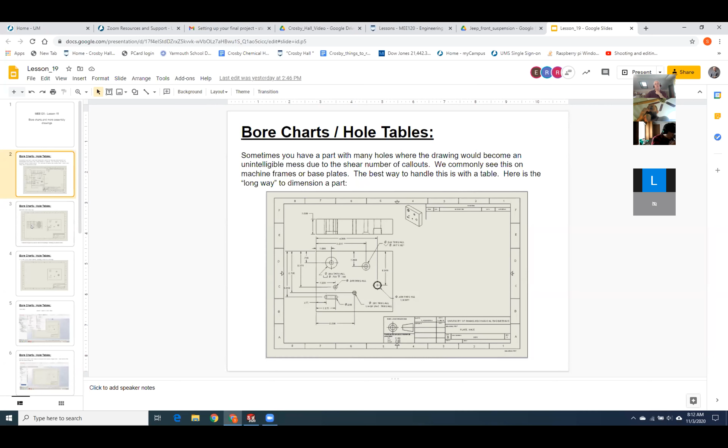That's with something called a bore chart. So rather than dimensioning all this out, what you're going to do is you establish an origin, you create a bore chart, and it gives you the location in X and Y, and then the type of hole. And it looks just like this.

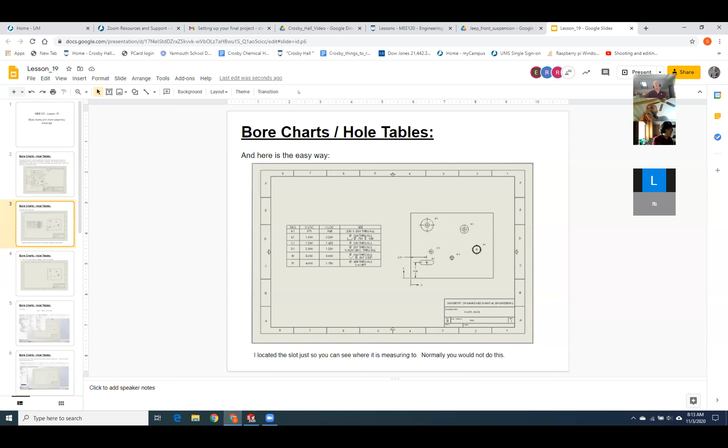So let's go through and demonstrate one of those. If you want to click along, download baseplate from lesson 19. And you can try this with me if you choose.

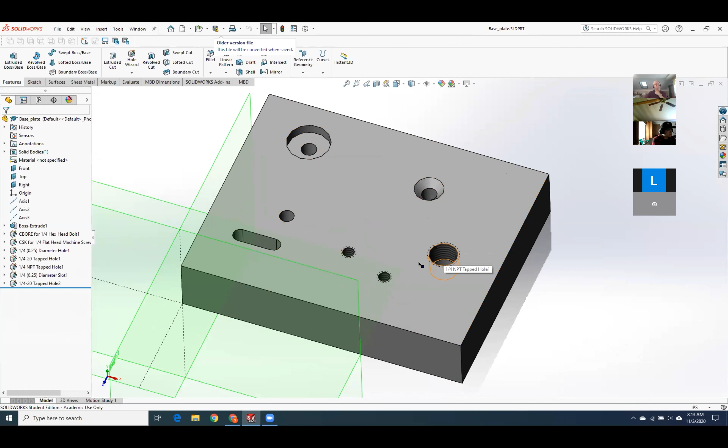Here's my imaginary base plate with a whole bunch of holes in it, all kinds of different types. We got a counter bore hole, countersunk hole, a pipe tap hole, a couple of quarter 20s, we got a slot. Now let's make a drawing of this thing.

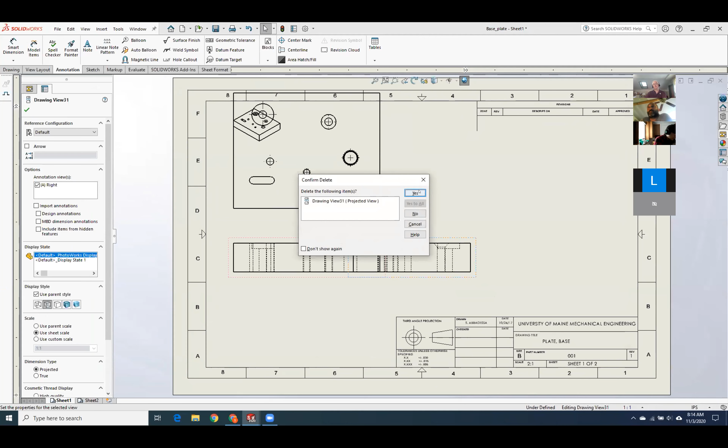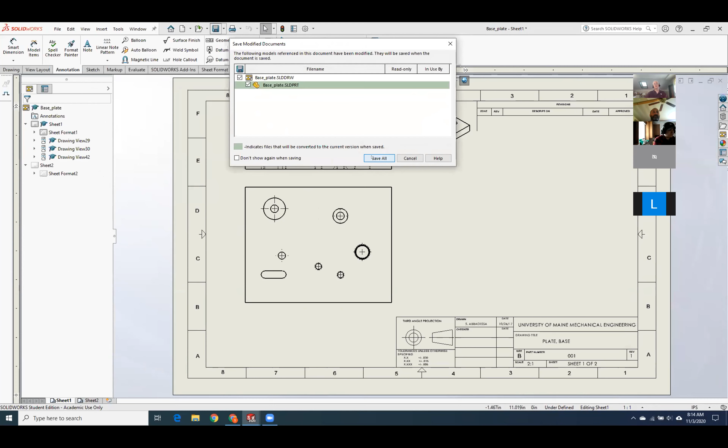So if I want to have all of this stuff annotated for me in a nice, easy fashion, I'll click on Insert, Tables, and we'll come down to Hole Table. Hole Table, Bore Chart, it's the same thing.

So first off, we're going to establish our XY origin. I'll establish my X-axis right here. We'll choose edge 1, we'll do the Y-axis. And you can see the start of an origin.

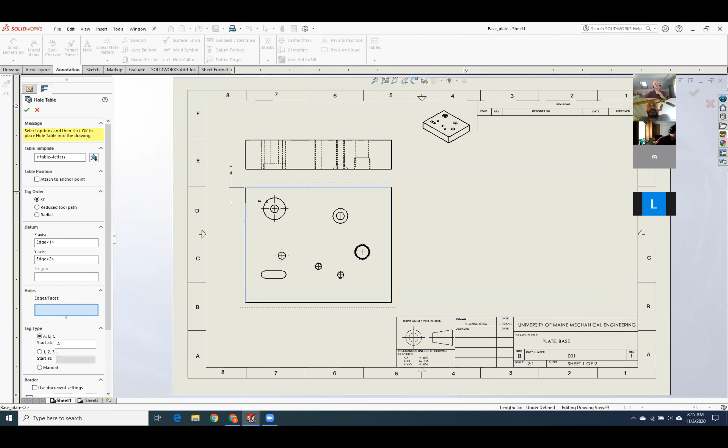And then we have to choose the face that we want to get the data on. We'll choose this face right here. As soon as I click the green check, it gives me this very nice little table, and that is all of the holes that I need to put in, as measured from right here.

And this is pretty slick. This is the same thing that you're going to get with the hole callouts. So for example, you get the tap drill size for your quarter NPT, get your tap drill size for your quarter 20s.

So I know some of you guys are still enamored with the idea of cut extruding circles. And I still say it's a terrible idea, but let's try it and let's see what happens.

It doesn't show up right. It shows up wrong. Even when you put the thread feature on, it shows up wrong.

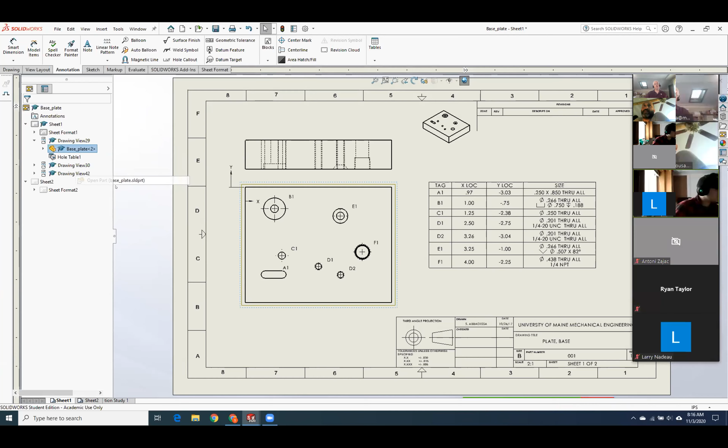Okay, so let's go back into our base plate. A1 is a slot. How does it show the slot? It says that it's a slot. And again, this is why I generally don't like putting in slots as hole wizard items.

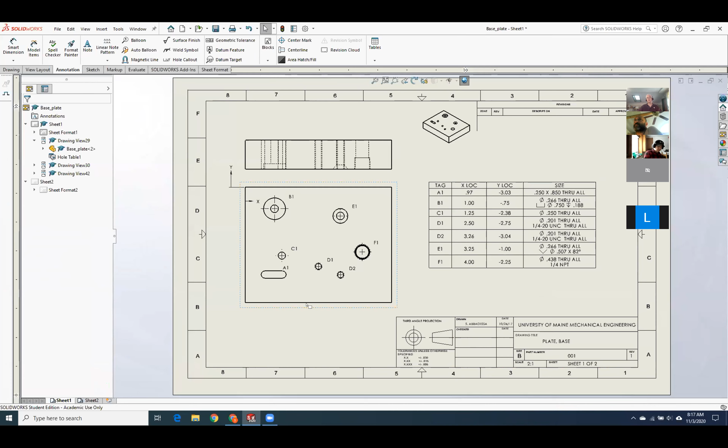Because if I was going to do this slot, the way I would do it is I would come over from this edge. I'll choose the slot option.

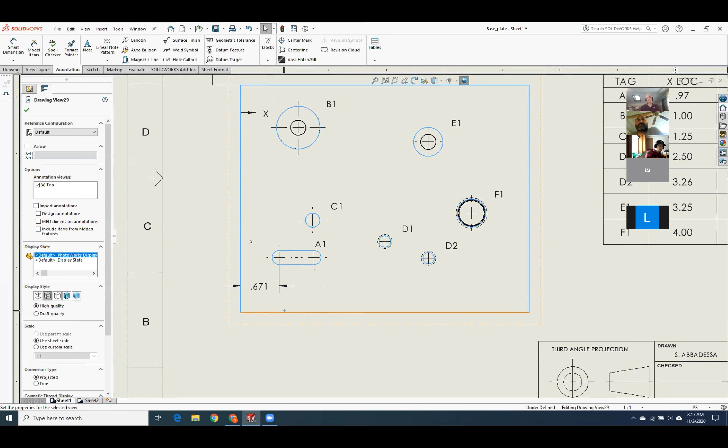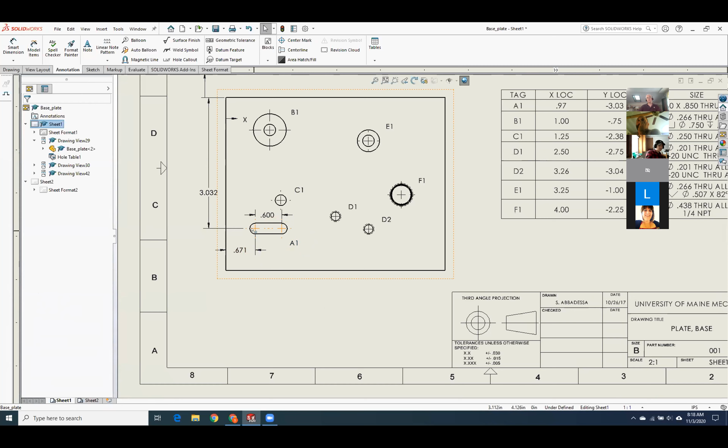So I choose the origin of the slot, and then I would go the length of the slot. And that makes far more sense to me, because this will tell me where to start my cutter at, and this tells me how far over to go. I can just set the digital readout to give me that.

Does that give you the slot radius on the chart? Let's see, so A1, 0.25? Yeah, so it's going to the outside ends of the slot.

Professor, could you go over one more time how you got that chart of bore callouts? Sure. Thank you.

Okay, so the slot does match the callout up here, but they never really gave you the origin of where to start the cut at. So you got to watch the slots on that one. The holes are generally not too bad.

Okay, so let's get rid of this, and I'll show you guys one more time how to do this.

Okay, so once you've got all your views on your drawing, we're going to do what SolidWorks calls a hole table. So we'll do insert, tables, and hole table.

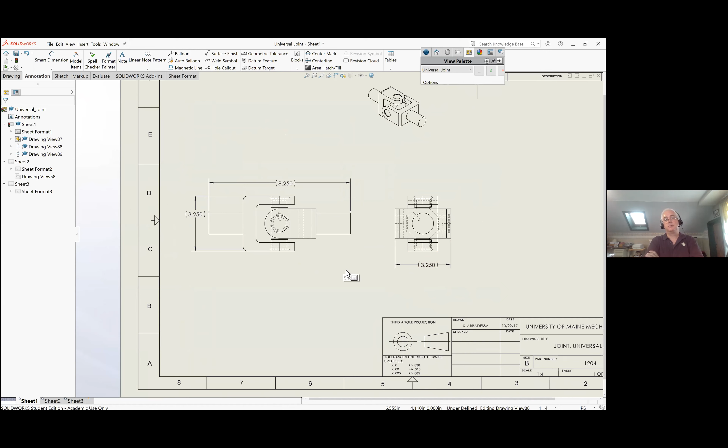Now, the one thing I would say is rather than that right view, how are you going to tell me how deep to press those bearing caps? I told you they were 1/16 of an inch down. Yeah, I guess I could do a section view.

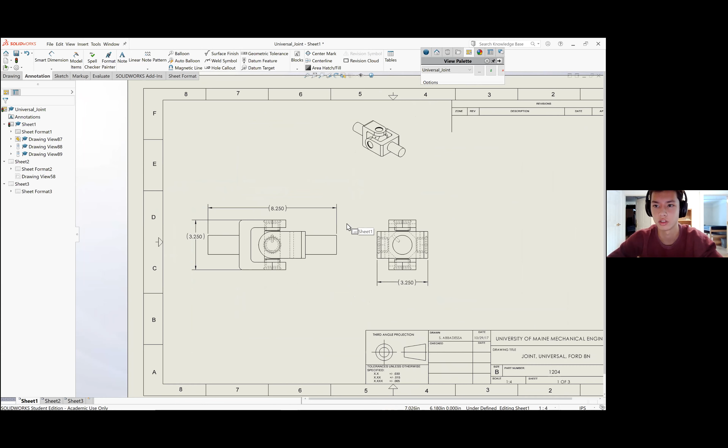Exactly. Okay, so I'm just overall a little bit confused about the 3 pages. I'm not sure about the first page, like what is supposed to be on there. I know overall dimensions.

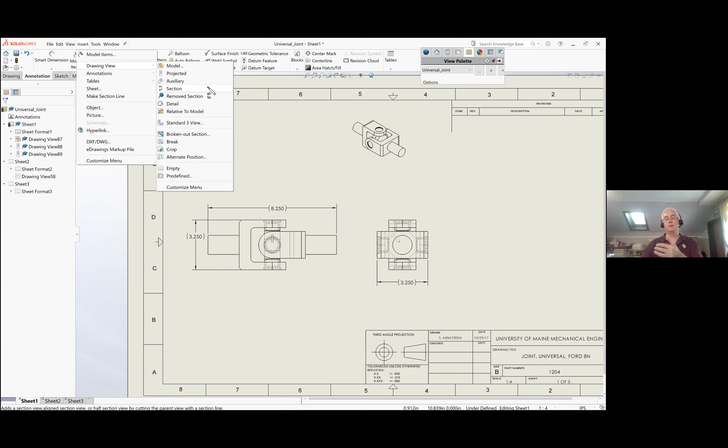Try the other orientation. There you go. Hey, no, you don't want to go there. Like here, right? Yeah, exactly. Much better.

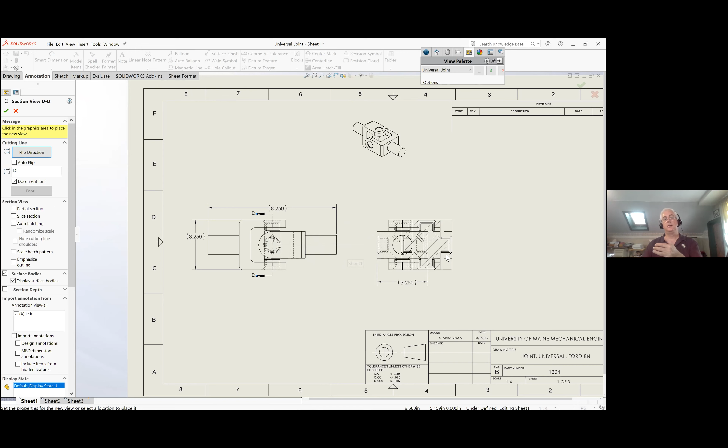I'll deal with that later, but perfect. Okay, so now you've got a nice visible edge, and you can go from the top of the yoke down to the bearing cap.

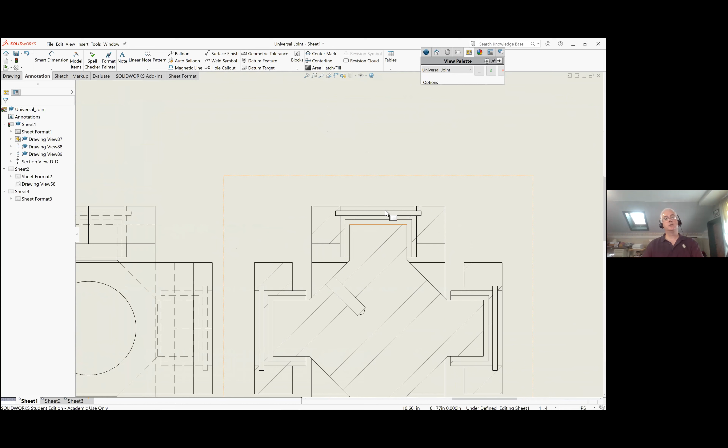Okay, so you mean like up here? Yep. So zoom in, grab a smart dimension, and go from the top. Go down one more. Whoops, maybe go down to the bearing cap.

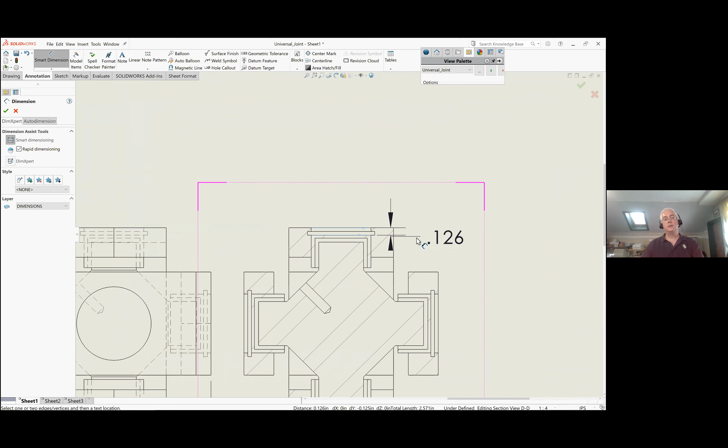Right there? Yep, right there. Maybe I got that wrong, maybe it was 1/8 inch. Close enough. Yeah, it's coming out 0.126, but that's exactly what I wanted.

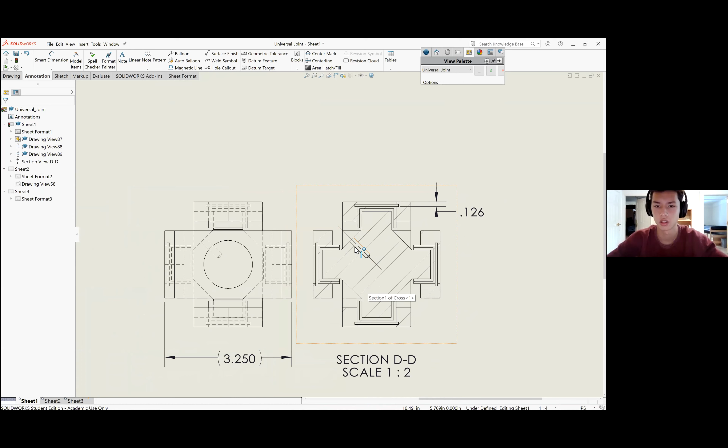That's how you would say push the bearing cap down a specific distance. Okay, and the location of this hole, that should all be included in the part, right? Exactly, that'll go in the piece part print. So I don't need to do a call out or anything for this. Correct, absolutely.

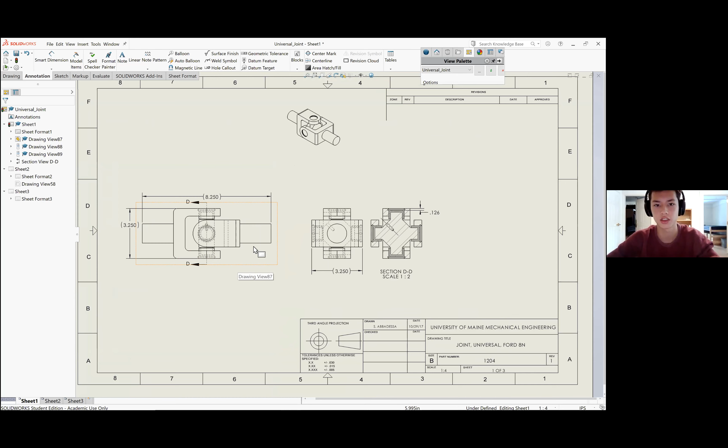All right, so you said dimension anything that you need to locate, but that doesn't include things that are just flush with each other, right? Correct, yes, anything you're going to set. For example, with the nut and bolt example, I set how far the nut was up the shaft of the bolt. In this one, I'm setting the depth of the bearing caps.

Okay, and my last question before I head out was I saw that email about checking in with the Stirling engine. Yep, and I'm signed up for sometime on Thursday. Just how is that meeting? Is there a Zoom link or something?

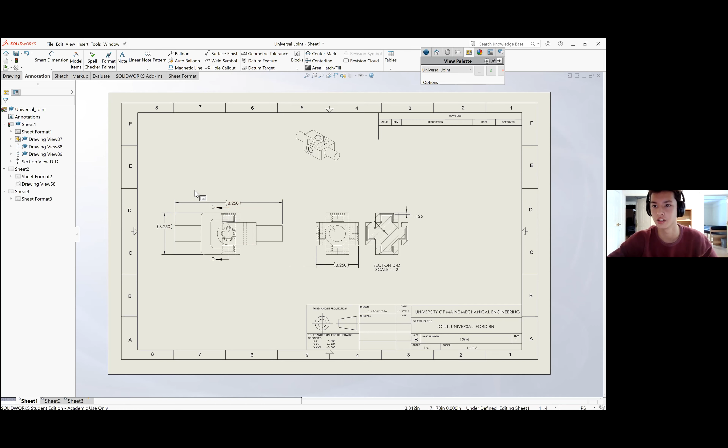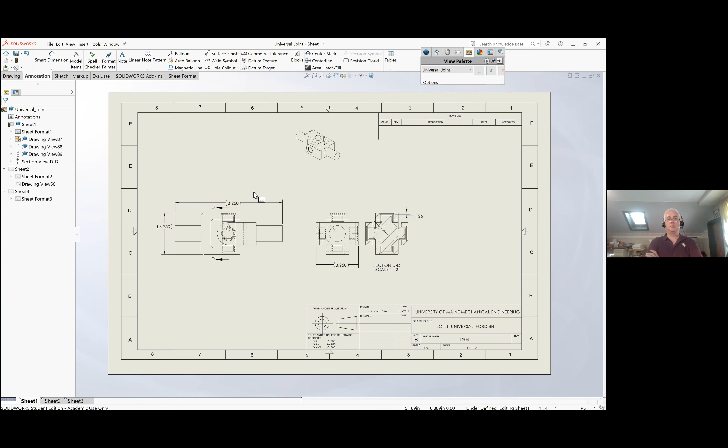Yeah, we'll use the office hours Zoom link, and it's really informal. All I do is I say show me your top level, and then I pick a few components. Typically I say show me your crankshaft, and I check that you have the right offsets for the displacer and the power piston. I make sure you got the 90-degree offset between the two bends. And then I just start looking around a little bit. As long as you're on track and you've got a good model, you're good to go.

Okay, I've done some piece part drawings, and I've spent most of my time on just the actual modeling rather than the drawings yet. Right, okay, so as long as you don't get really behind with it, that's fine. Okay, thanks.

I had a question. Yeah Ryan, go for it. Can I share my screen? It's all yours. Okay.

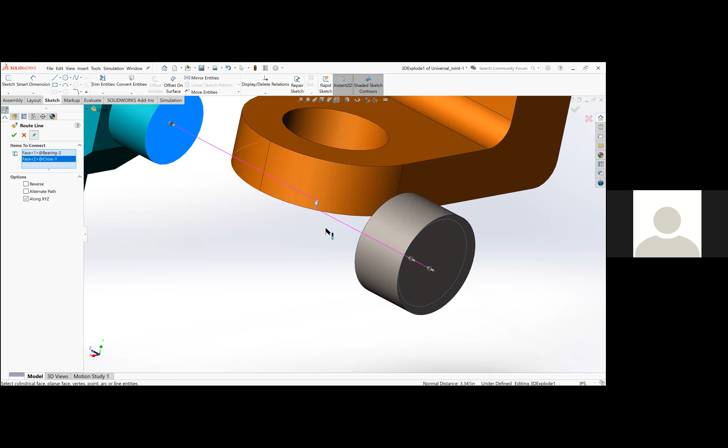Whenever I try to make the route lines, it kind of bends it some weird way. Yeah, in your case doing the route line thing, I wouldn't do that for this exact reason. So I would X out of route line and just manually draw them as sketch lines.

Okay, I'll try that again. Exploded line sketch, so do you not want to do that? Yeah, I would not do route line.

So how do I do it instead? Because I thought you did insert explode line sketch. Okay, so go back over to the assembly manager and go up to the configuration manager.

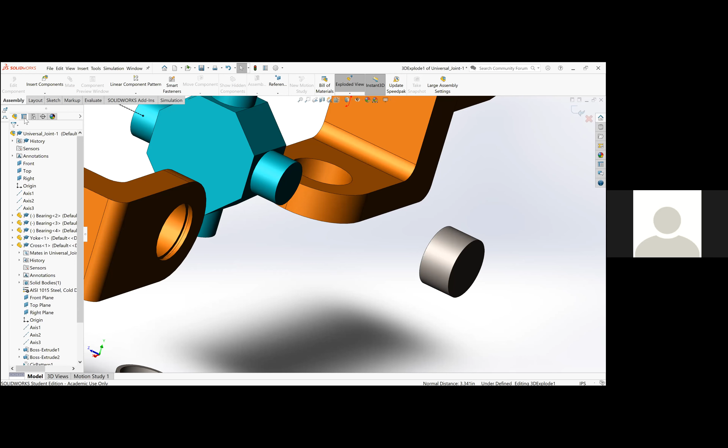It's that middle one, go down to the left. It looks like a couple of pages in an assembly tree. Down to the right, one more icon. There you go, click. Okay, so now expand that default.

Yeah, I tried to do some already. Okay, so you got a bunch of exploded views, you're in exploded view 3. Now expand exploded view 3. Okay, so you do have a sketch. Let's click on 3D explode 1, then right click and hit edit.

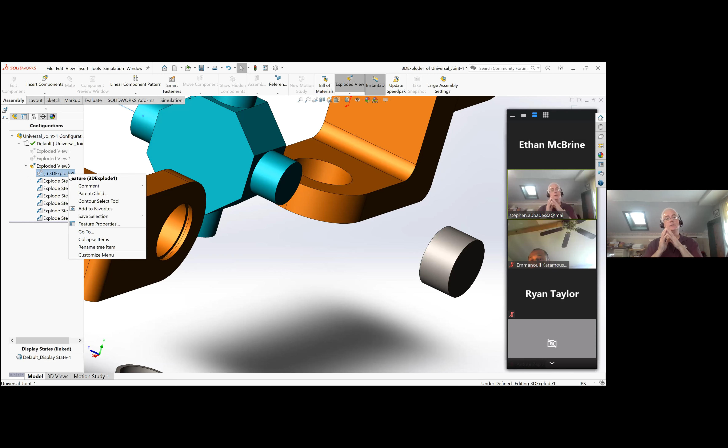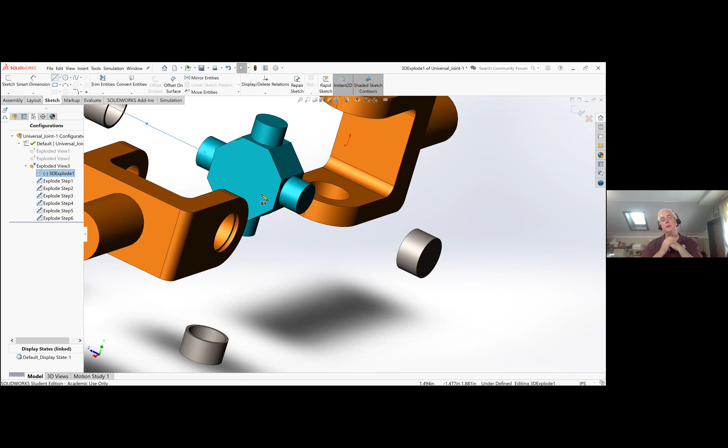Okay, so now go up and click on the sketch tab, and choose your line tool. You should be able to go from center of faces to center of faces. There you go, perfect, click.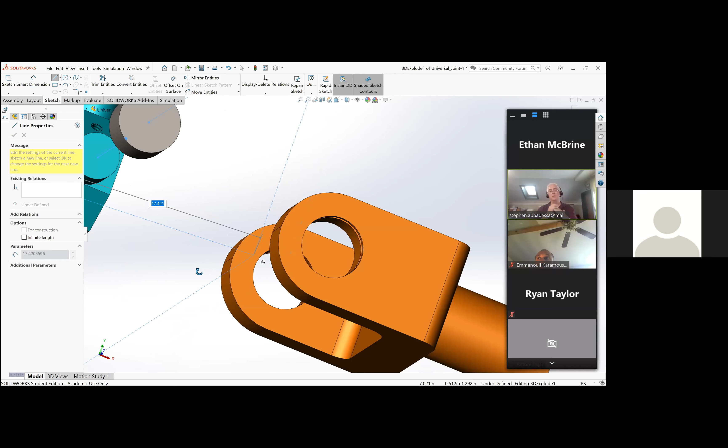Now rotate your view so that you can see into that gray bearing cup. Rotate some more - for some reason my Solidworks is going really slow right now. There you go, okay. Now grab the center of that bearing cup, see if it lets me.

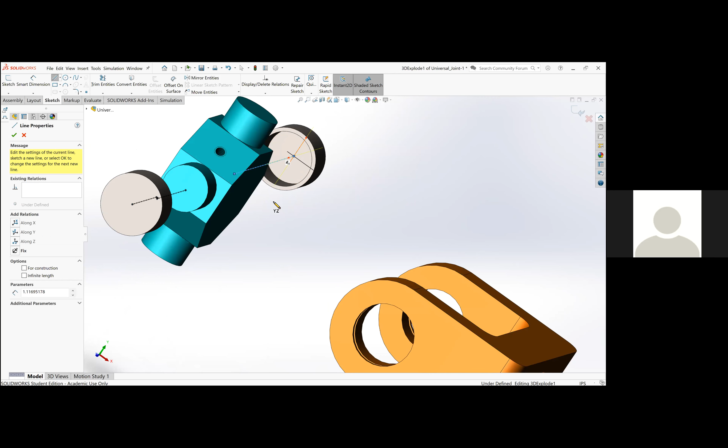So you probably want to highlight one of those edges first and then you'll get the center. Okay, nice, that'll work fine. And now you're not getting all those jaggies and broken edges. Yeah, that makes sense.

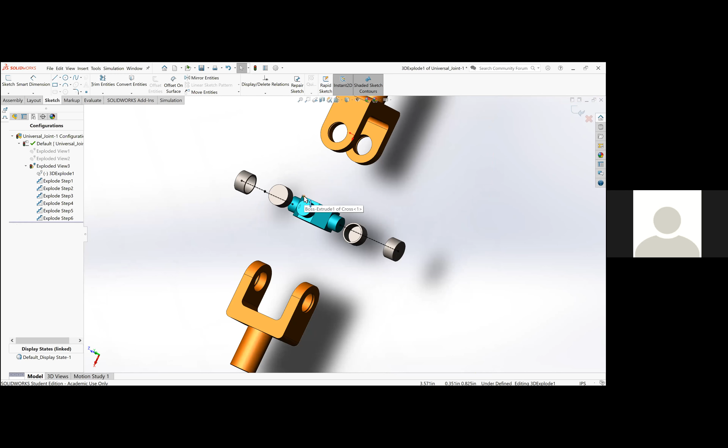And you said for this homework we do this whole thing out - the exploded view, make the 3-page drawing for it? Yep. And then we do the individual piece part drawings for the cross and the yoke, then do the same thing for the Jeep, do a whole assembly, and then the spindle and the brake drum for individual drawings. Correct. Okay, all right, that's all I needed. Thank you, okay.

I have a quick question. So I did the exploded view and all of the sketch lines in the assembly, and then went through the drawing, did my first page, and then I cannot figure out how to do the exploded view in the drawing for the second page. Show me your screen, please.

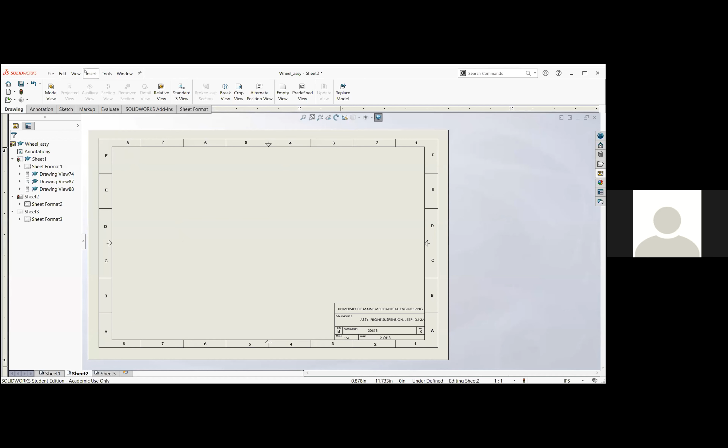Okay, yeah, that makes sense. All right, want me to go back to the assembly or just here? No, I think you're good there. So what you're trying to do is drop in the exploded view. Okay, so click on Insert, go down to Drawing View, then Model.

Wheel Assembly - like drag it over. No, double click on it actually. Oh, there we go, that's what I was missing. Okay, good. So show an explode or model break state.

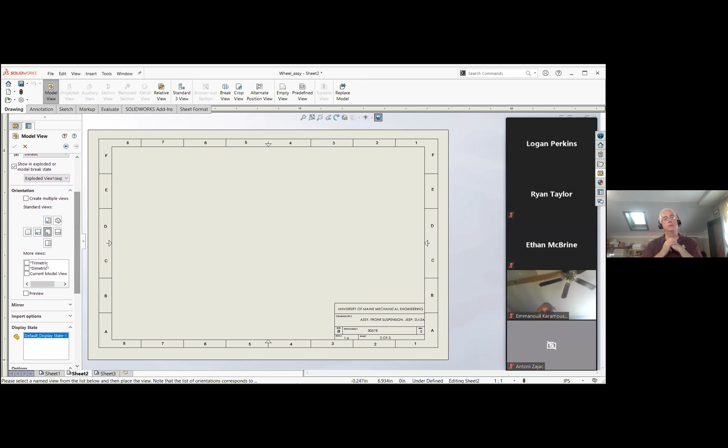That's good. Okay, so what I'm not seeing that I want to see is there should be a named view for your explosion. Yep, I forgot to do that. Okay, so then let's go back to your assembly and create that named view.

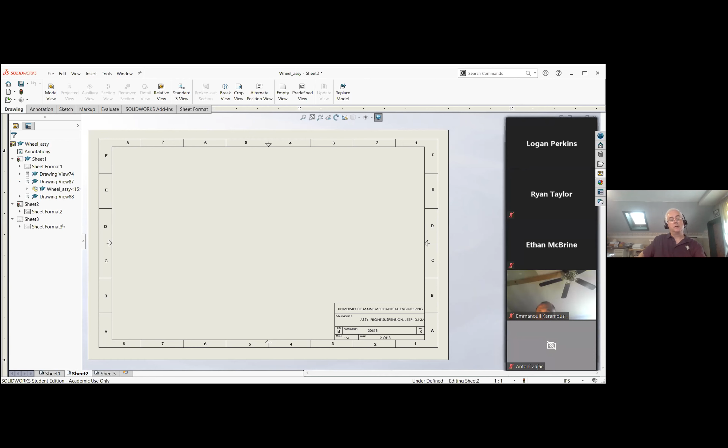So go down, see where it says drawing view 87, expand that. Good. And then on the wheel assembly, right click and hit open. It's not - oh, because we're on the wrong page. Click on sheet 1 and then you'll be able to do it. Gotcha.

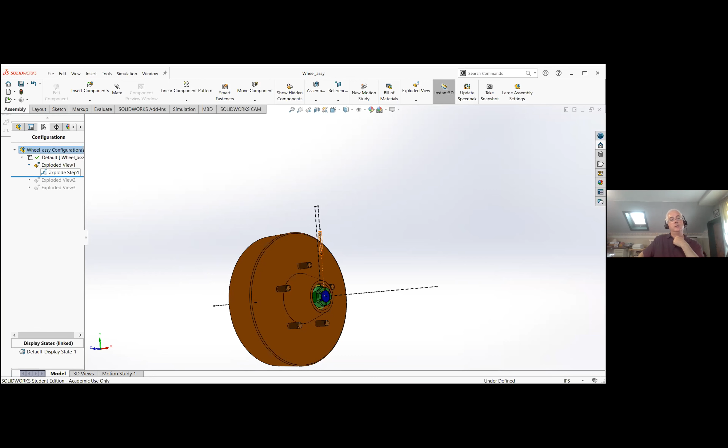Okay, so now let's re-explode this thing. Yeah, that's bad. Yeah, you got something going on there. Expand that. Expand exploded view 1. So that's weird, it was like acting weird.

Maybe it could - can you show this one? Yeah, go ahead and hit delete those other ones. Maybe. Yeah, definitely delete anything you're not going to use. I'll just delete this one. That's not right.

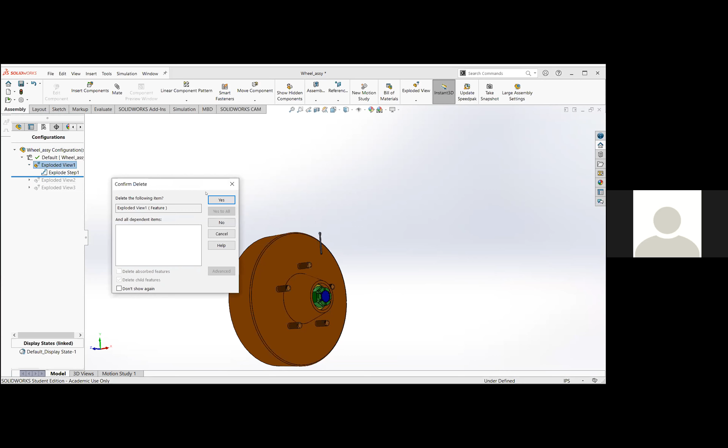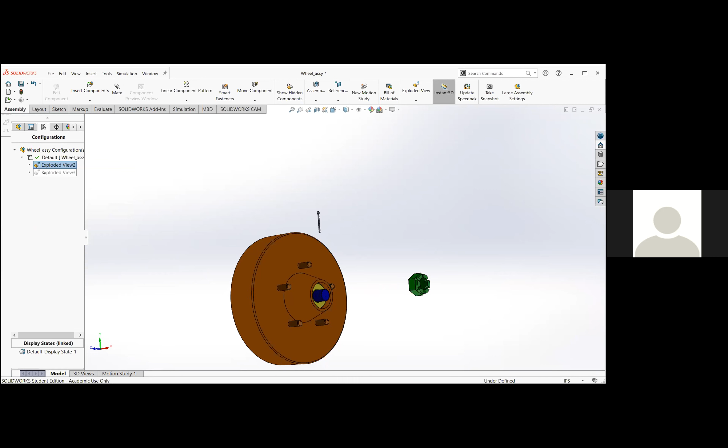Okay, well that's not the right thing. How do I show it? So you're in an exploded state right now. Yeah, but it's not - all right, I think this one. I think it was that last one because I got it right on the last try. There's 3 tries.

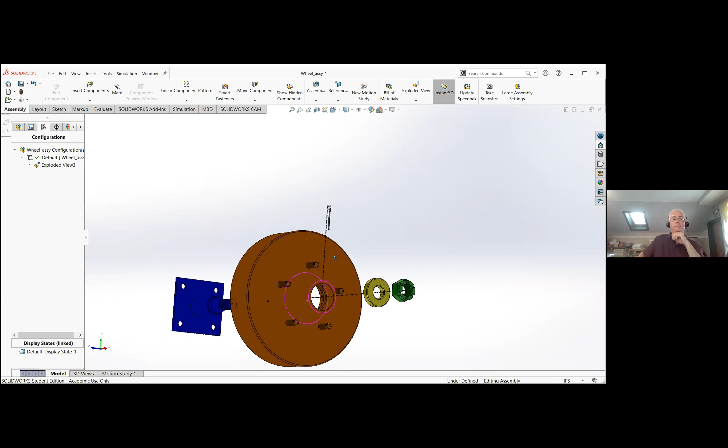Okay, there we go. Nice, okay, so spin the view around however you want it. Something like that, maybe. And just as an FYI, I would have that cotter pin going down into the hole on the blue spindle, because you've got it going down, but you're not showing me where the cotter pin gets installed. Right, so how would I do that?

So you could add another explode step and drag that cotter pin back in line with the hole. And the other thing, what you're telling me with those trace lines, you're saying flip the cotter pin upside down and then ram it through the installation hole, which, you know, that might be hard - that might be a challenge. Yeah.

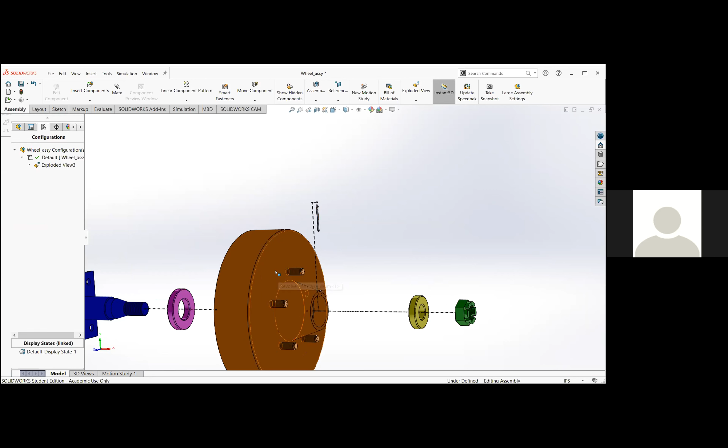Okay, so anyway, I need to add more steps to that. Yeah, so just cotter pin - come off the bottom of the cotter pin, go into the hole. Okay, but that aside, right, go ahead and orient your view however you'd like it.

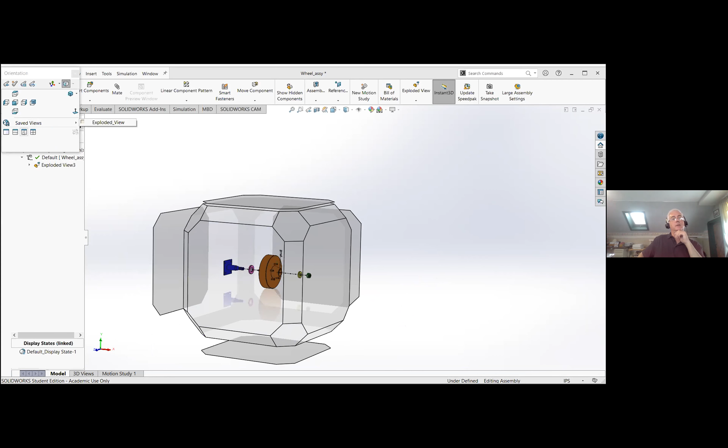Yeah, okay. That looks pretty good. Okay, so right click in the graphics area, go down to view orientation, and then in that dialog, go to the second icon from the left on the top row. Up, there you go, new view. Good, give it a name like 'my exploded view.'

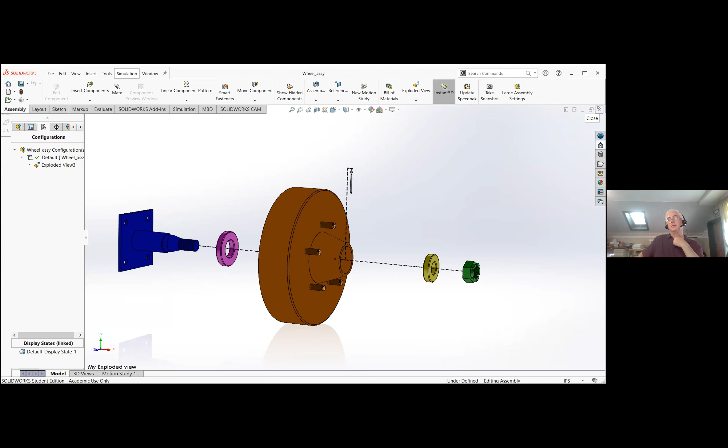Say okay, then you can dismiss that dialog and save it. Okay, now close out this view, do the little X, and there you go - that'll take us back to the drawing. Now let's go to sheet 2 and drop in that exploded view.

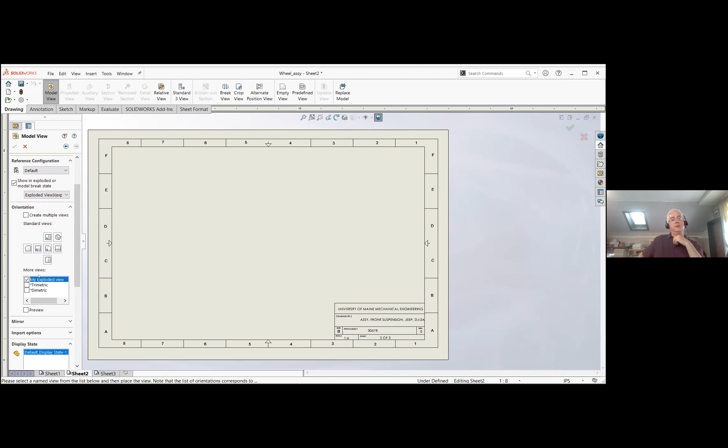Okay, much better, there you go. That's it, all right. Okay, thank you, so other than fixing those little things, you're cooking with gas now. Sounds good, thank you.

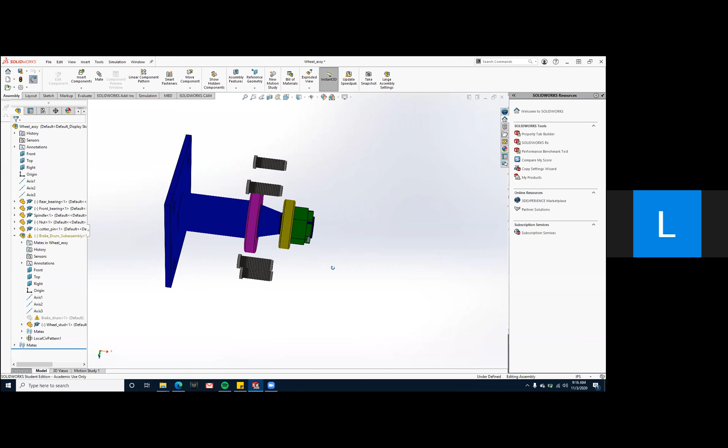Professor Abadessa, when I open the wheel assembly it glitches out, and the brake drum doesn't show. Okay, show me. I'll share real quick. So this is what it looks like whenever I open the wheel assembly, I don't know if you can see that or not. Yeah, so for some reason it didn't load the brake drum subassembly. Try downloading again and reopen it. Okay, I'll do that real quick.

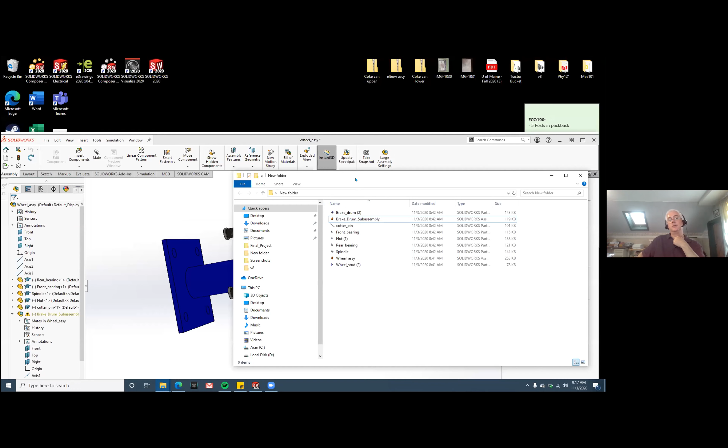Oh, there's the problem right there. Get rid of that one on the end of it. Which one? Oh, this? Yeah, rename it. Okay. Nice, okay, and then get rid of the 2 on the brake drum, it's going to have problems with that too. Okay, and like nut 1 says, all this here too, and wheel stud 2, yeah, get rid of all those numbers on the end. Okay.

Okay, so that should be fine if I reopen that. Absolutely, yep. Okay, awesome, thank you.

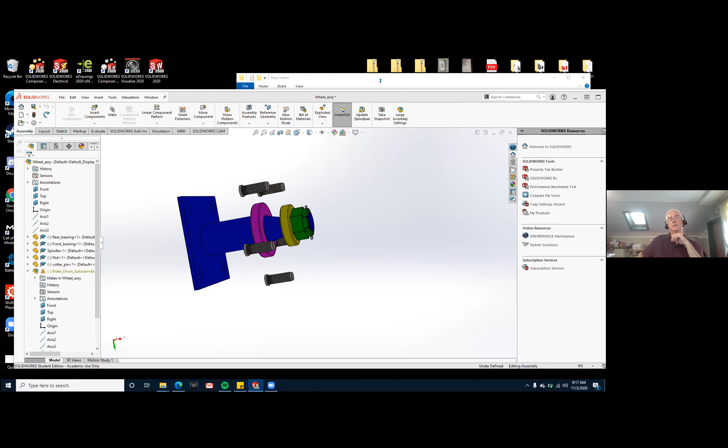I had one more question. Yeah, go for it. When you are putting the line to show, or the path line, for the yoke to go to the cross. Yep. Can you put it, or do you mind if I show mine? Absolutely, go for it. Okay, I need to open it real quick.

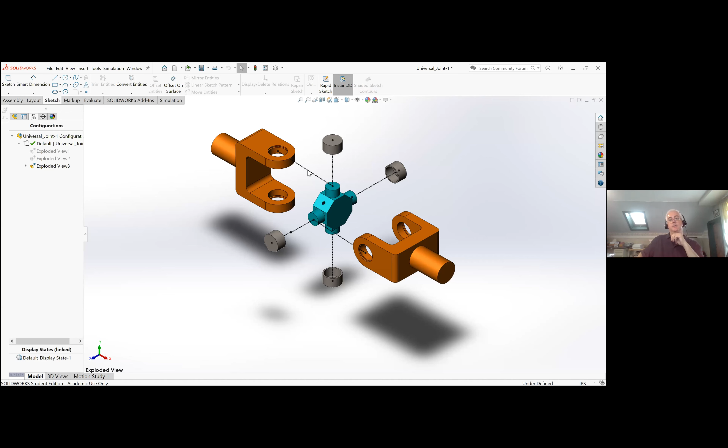One sec. I just put it like this. Is that all right? Top. Yeah, that's fine. Okay, all right, thank you.

Professor, take a look at the... oops, sorry. Go for it, Ryan. I had my chance. Can you take a look at the cross yoke that I did? Sure, go for it, take the screen. Are there any dimensions that you think I'm missing?

Okay, so we've got that hole, and you've got it at 3/8. Yeah. You got 3/8, that's actually not bad. So I was trying to push you guys into having to do an aligned view to say where that hole is, but that actually looks pretty good.

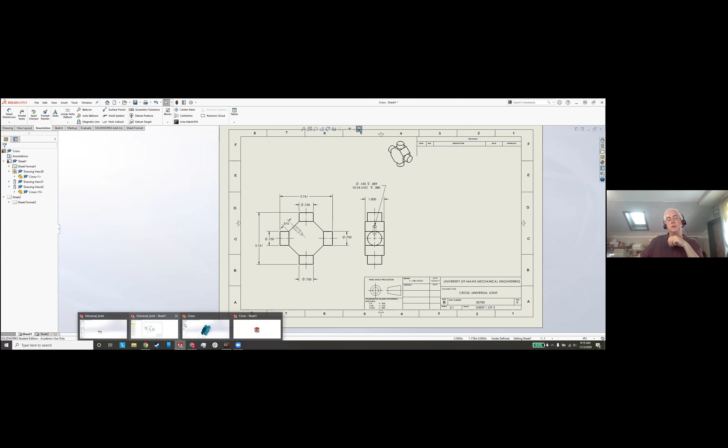All right, and then can you take a look at that, and make sure you put the material note on it. Okay, I'll do that. And I was also wondering on this one, is this dimension clear enough for you? Yes, absolutely. Okay, thank you. Now, you're probably going to want to put it on the other 4 legs as well, or the other 3 legs. Oh okay, I can do that.

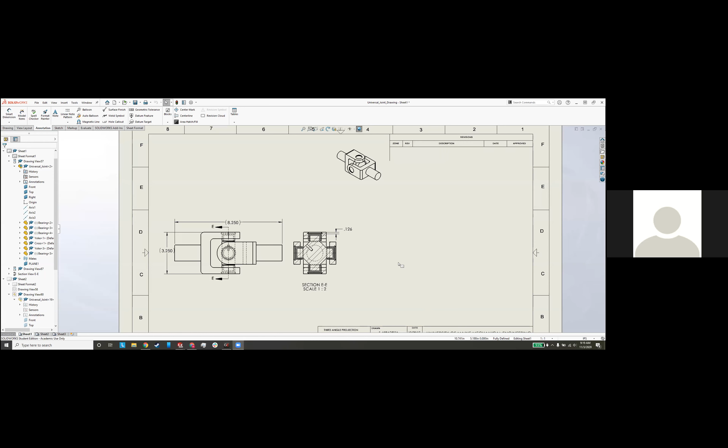But other than that, you're good to go. All right, thank you. Have you put a 4x to say that it's in 4 places instead? Sure, you could put a suffix on it and say 4 places. Sure, that'd be clear.

How did you say to go about showing that the cotter pin needed to go into the spindle? I didn't really catch that part. So what I would do is, in your initial explosion, I would have dragged the cotter pin straight up, and then draw the line down to the installation hole. Just down to the other line for when the spindle comes in. Yeah.

I don't have to show that the cotter pin goes with the spindle and then drops down in? No, that's getting too complicated. If you guys just show me the cotter pin goes in the proper installation hole, I'm good with that. Okay, alrighty, thank you.

Last question before I go. Sure, Emmanuel. On the next lesson, I cannot activate the RealView, do we really need it? No, no. Even when we get to the photo rendering lecture, a bunch of people aren't going to have RealView because of their video cards. Yeah, that's totally fine. I go over it, but it's just to show you guys what you can do. Okay, thank you.